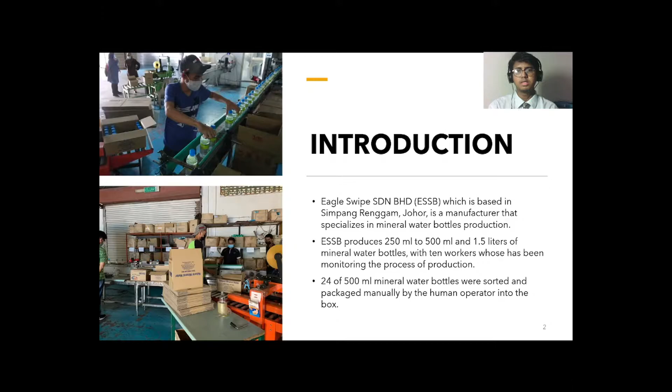In this project, I will focus more on the packaging section, where 24 mineral water bottles are manually packaged by the worker. From this project, there are 3 problem statements that can be determined: the failure of determining the working principle of the automatic bottling packaging machine, which can transfer the bottle into the box without human interference; second, the improper and failure of designing an automatic bottling packaging machine which can replace the manual process with an automation process; and third, the failure to conduct the simulation process on the automatic bottling packaging machine.

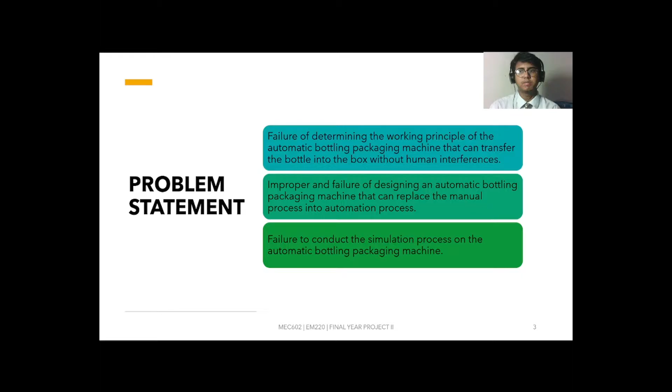Therefore, from the previous problem statements, we can outline the objectives for this project, which are: to identify the process of transferring the mineral water bottle into the box by the automatic bottling packaging machine, which can replace the manual work; and second, to design and simulate the automatic bottling packaging machine.

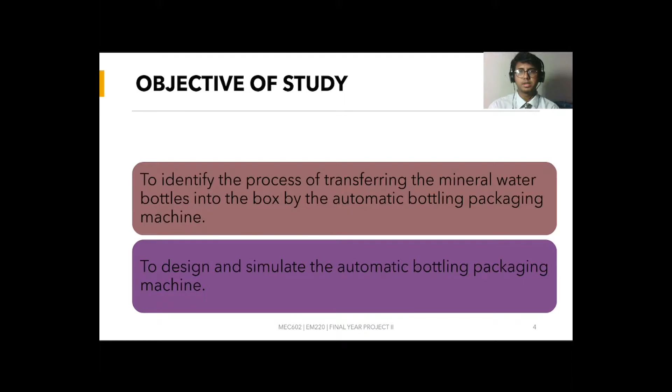The scope of work which has been conducted throughout the whole project are: first, the industrial visit at the production plant; second, conduct research on the automatic bottling packaging machine; third, selection of the correct devices and design to be used in the machine; next, determination of the working principle of the machine; and lastly, design and simulate the machine using computer-aided design, CAD software.

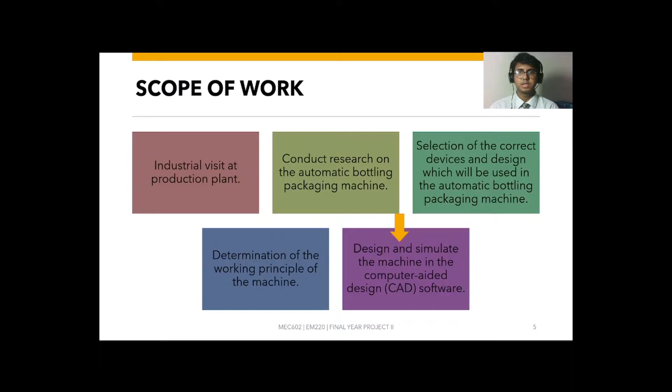As you can see here, this is the flow of research which has been conducted throughout the whole project. First, industrial visit at ESSB, and after that, determine the problem statement and identify the working principle and devices which will be used for the machine.

After that, the design must be drafted. Once drafted, it must be revised with the supervisor. If the supervisor agrees with the design, the next process is to make a CAD design using SolidWorks software. But if the design is disagreed with by the supervisor, we must do a correction by identifying any potential problem which can affect expenses, safety, reliability and quality of the product, and then fix the design to overcome the problem.

After making the CAD design using SolidWorks software, the last process is to conduct a simulation on the prototype of the machine via the motion study feature in SolidWorks. In this flow of research, you can see the first objective shown, and the second objective is also shown.

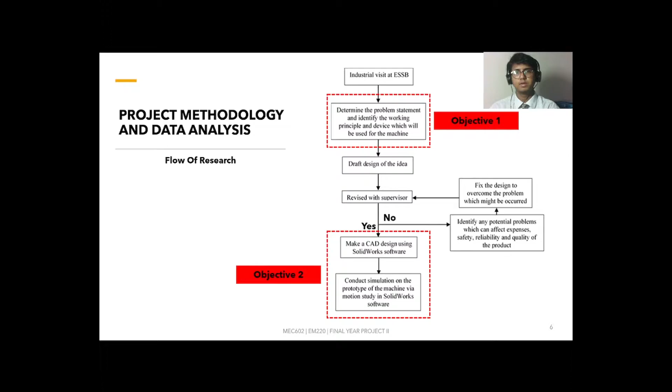As you can see here, this is the industrial visit at ESSB. The purposes of the industrial visit are to determine the existing dimension of the floor plan for the packaging section, second to determine the dimension of the bottle and box conveyor, and lastly to measure the production time in the packaging section.

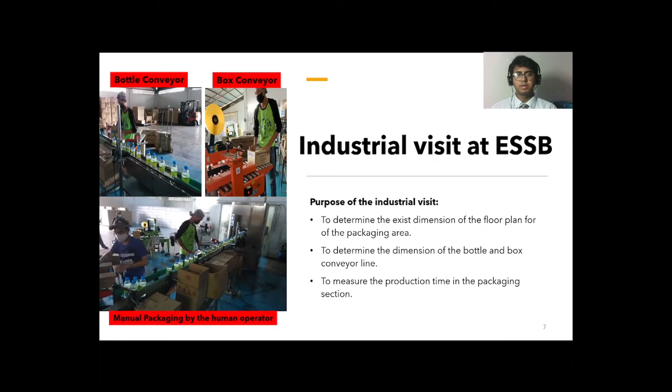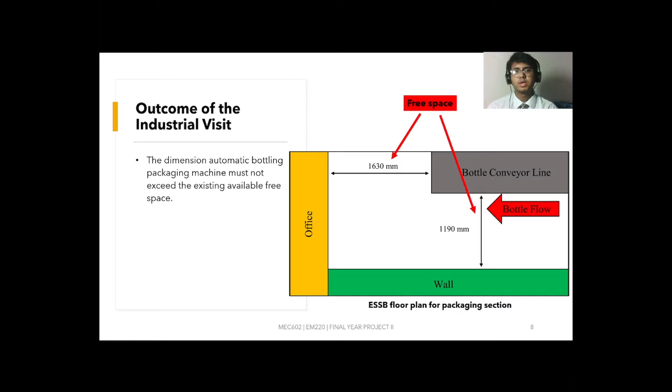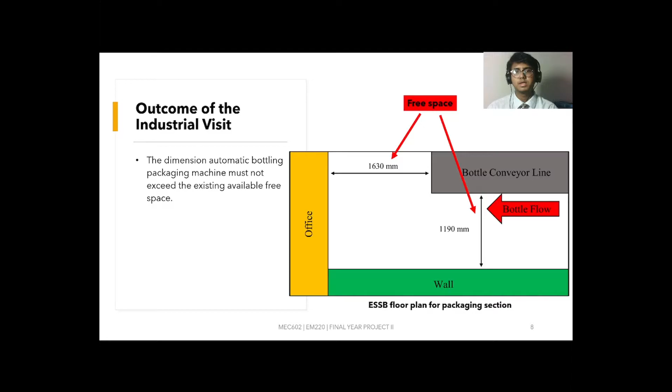From the site visit conducted at ESSB, the dimension of the floor plan for the packaging section was measured. Therefore, the dimension of the automatic bottling packaging machine must not exceed the existing available free space. As you can see here, from the existing bottle conveyor line to the office is about 1630 mm, while from the bottle conveyor line to the wall, the existing dimension at ESSB is 1190 mm.

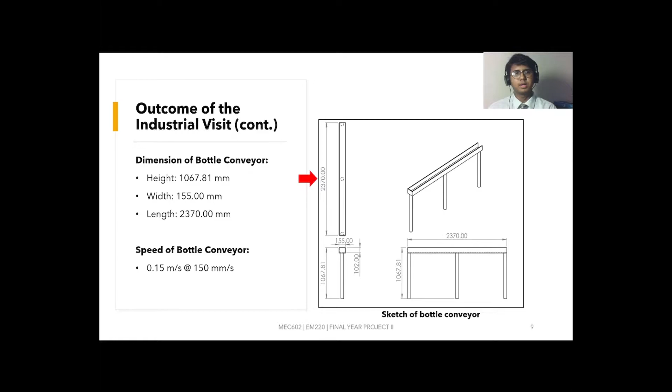From the site visit at ESSB, the dimension of the existing bottle conveyor was measured. The height for the bottle conveyor is 1067.81 mm, while the width for the bottle conveyor is 155 mm. The length for the bottle conveyor is 2370 mm, and the speed of the bottle conveyor was calculated to be 0.15 meter per second, or 150 millimeter per second.

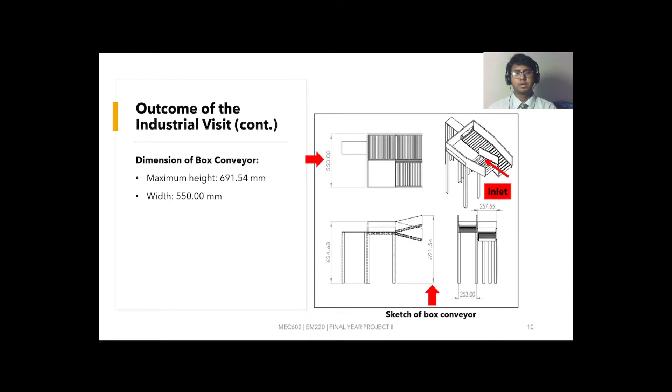From the site visit, the box conveyor was also measured. The dimension for the box conveyor's maximum height is 691.54 mm, where the box will travel along the inlet of the box conveyor, and the width which was measured is 550 mm. From the site visit at ESSB, the duration for 24 bottles manually transferred by the human operator into the box takes about 16 seconds.

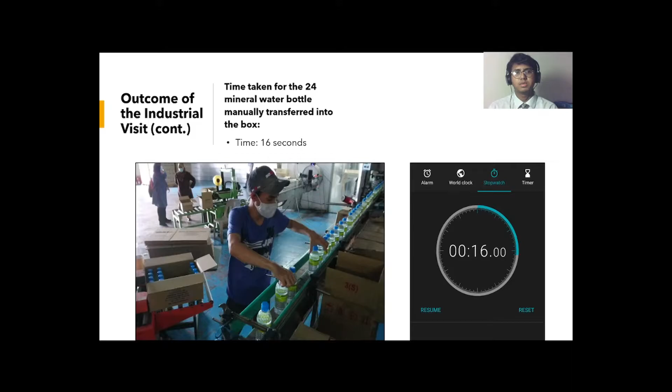In this slide, I will show you the existing automatic bottling packaging machine in the industry.

The model of the automatic bottling packaging machine is 939 APT Versatron Active Product Transfer Case Packer, which was manufactured by Standard Knapp Inc. The mechanism on how the product is transferred into the box is by utilizing the force of gravity. This is the video on how the product is transferred into the box by utilizing the gravitational force.

The product transfers along the bottle conveyor, and as you can see at the bottom of this machine, in this next preview, it will show you the product falling down into the box by the gravitational force.

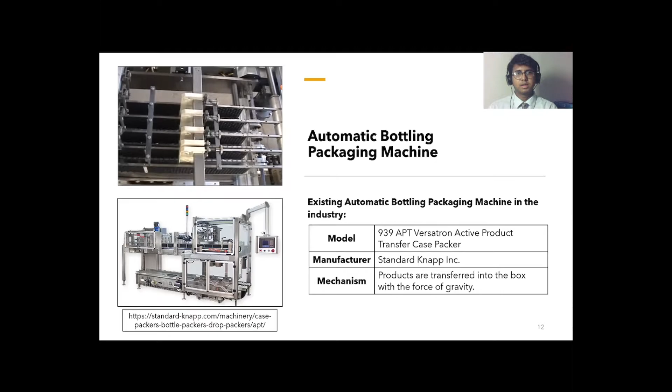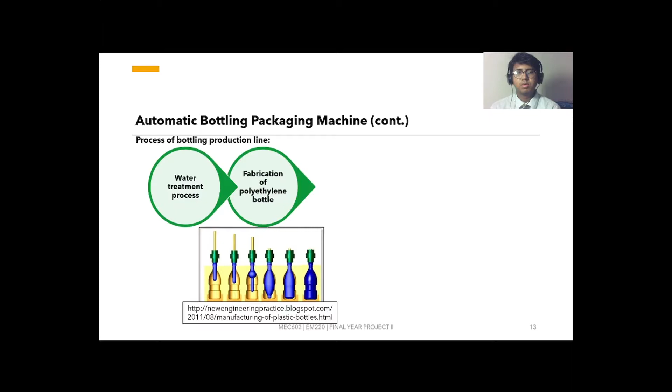In this slide, I will show you the process of the bottling production line. First, the water treatment process. Next, the fabrication of the polyethylene bottle through the blow molding process, and then the water filling process, and after that the labeling process, and lastly the packaging process.

The literature review which is related to this project. First, according to Abueejela et al. 2015 in the automated packaging machine using PLC, packaging process is known as the mechanism that is intended for distribution in form of merchandise, packaging, and bundle into the container, package or protect the material, food, and wood with the utilization of a conveyor belt system.

Besides that, packaging process is also known as the system for preparing products for shipping, storage, logistics, and eventually for the customer. Next, according to Satyanarayana Murthy 2019 in Design of Controller for Inspection, Packaging and Storage, the benefits of utilizing the automatic packaging machine in the production line are: it will meet the industry and consumer demands. Next, it will maintain the package safety, and lastly, it will reduce the environmental effects.

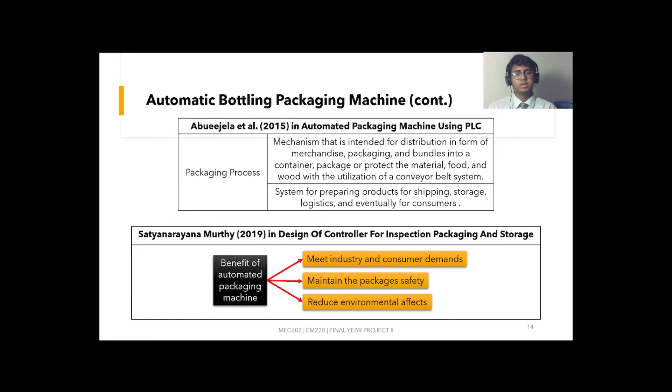There are three main parts in the automatic bottling packaging machine: the input device, controller, and output device. The literature review related to the input device: according to Oladapo et al. in Model, Design and Simulation of Automatic Sorting Machine using Proximity Sensor, a sensor that detects the presence of an actuator or product is referred to as input device.

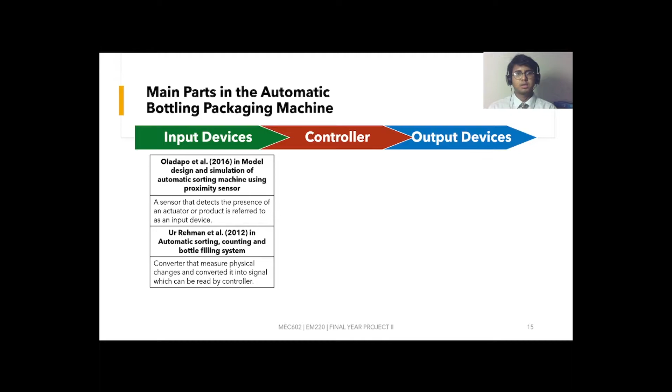Next, according to Ur Rehman et al. in automatic sorting, counting and bottle filling system, input device can be known as the converter that measures physical change and converts it into a signal which can be read by the controller. The controller can be known as the component that interprets sensor data and sends signals to the output device.

According to Saraf et al. in design and development of cost-effective automatic machine for powder packaging, controllers can be classified into three types, which are relay controllers, programmable logic controllers or PLC, and lastly microcontrollers.

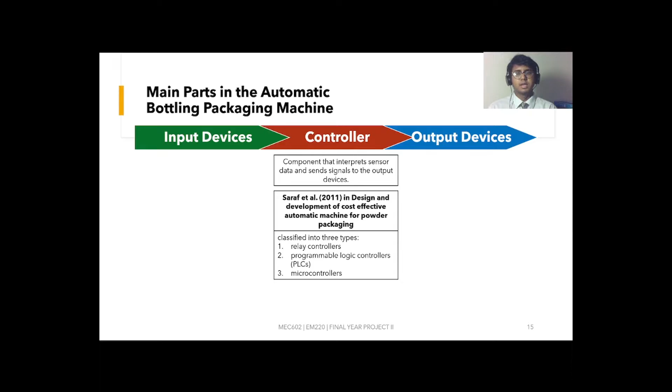The output device can be known as the component that receives the controller electrical signal and converts it to mechanical energy. According to Figliolini and Rea in design and test of pneumatic system for production automation, in the manufacturing industry, pneumatic and electro-pneumatic components are used to solve problems in product and automated process.

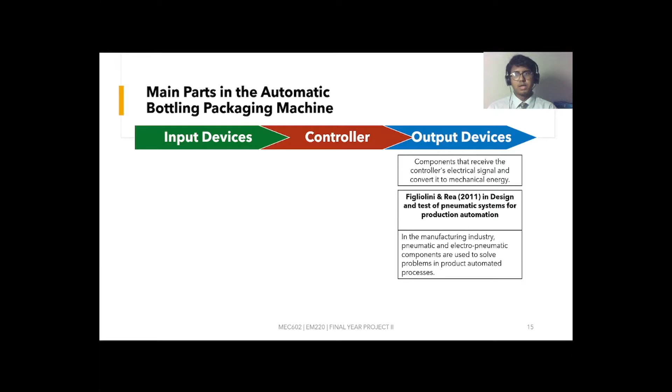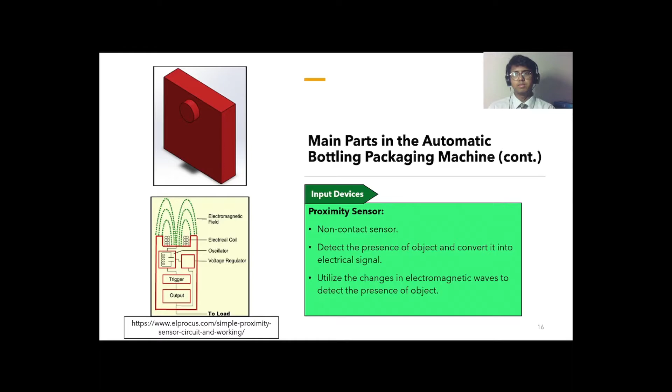For the controller part, the automatic bottling packaging machine utilizes the PLC. According to Mozhi et al. in PLC controlled automatic food packaging machine, PLC can be known as an electronic device with programmable memory that stores instructions and scans the input memory and outputs predictably.

And according to Saraf et al. in design and development of cost-effective automatic machine for powder packaging, the benefits of utilizing the PLC in the industry: it has various input and output arrangements. Next, it is resilient to vibration impact, and lastly, it has a wide temperature range.

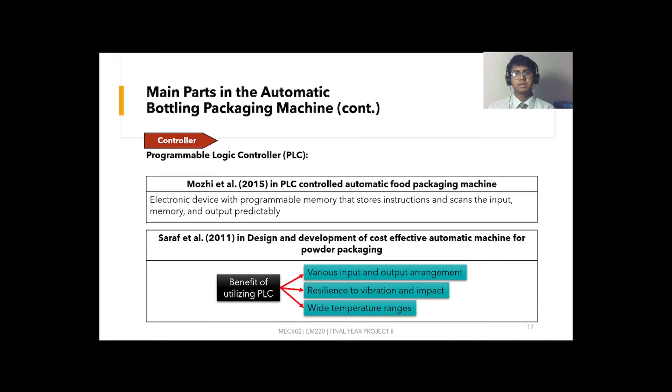There are three types of actuator which exist in the industrial sector. First, the pneumatic actuator. Second, the electric actuator, and lastly, the hydraulic actuator. The advantage of utilizing the pneumatic actuator is it has high safety, cheap price and fast response, while the drawback of utilizing the pneumatic actuator is it has poor stability.

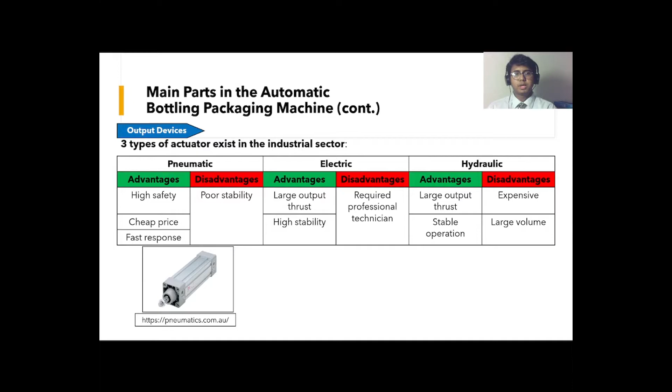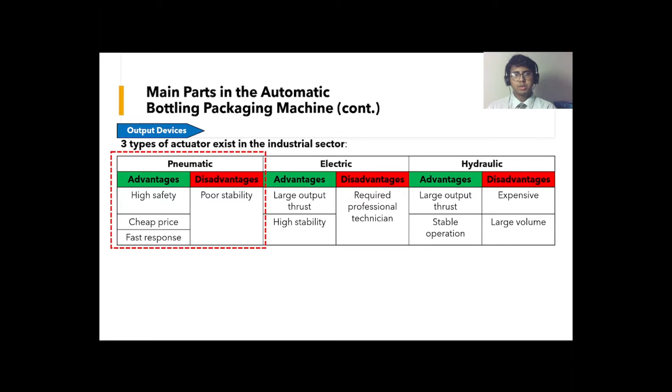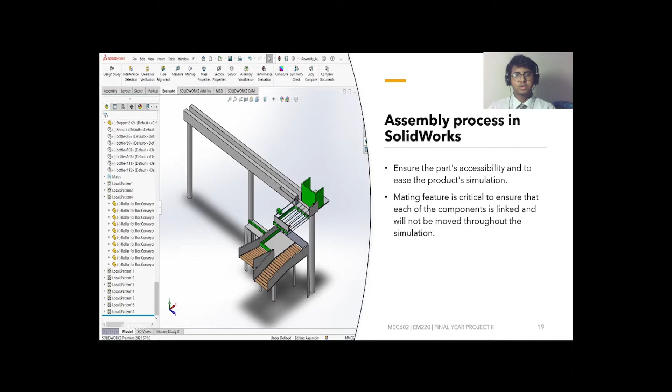For this project, the automatic bottling packaging machine will use the pneumatic actuator. This is the assembly process in the SolidWorks software. The reason why the assembly process must be conducted in SolidWorks is to ensure part accessibility and to ease the product simulation. In the assembly process, there is a mate feature. The mating feature is critical to ensure that each component is linked and will not be moved throughout the whole simulation process.

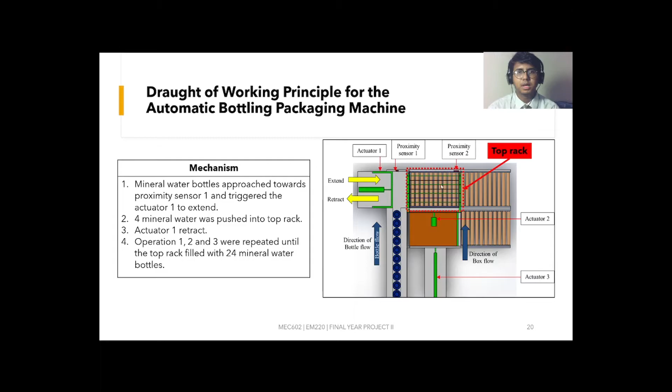In this slide, I will explain to you the working principle for the automatic bottling packaging machine. First, the mineral water bottle will approach toward proximity sensor 1, and it will trigger actuator 1 to extend, and then 4 mineral water bottles will be pushed inside the top rack, and after that actuator 1 will retract. Operations 1, 2 and 3 will be repeated until the top rack is filled with 24 mineral water bottles.

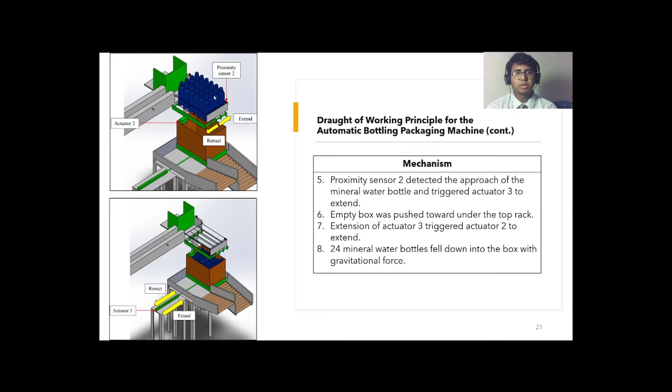Next, after the 24 mineral water bottles fill the top rack, the proximity sensor detects the approach of the mineral water bottle. Here it will detect the mineral water bottle and trigger actuator 3 to extend. Therefore, the extension of actuator 3 will cause the box to be pushed under the top rack. After that, the extension of actuator 3 will trigger actuator 2 to extend. The extension of actuator 2 will cause the 24 mineral water bottles to fall down into the box with the gravitational force.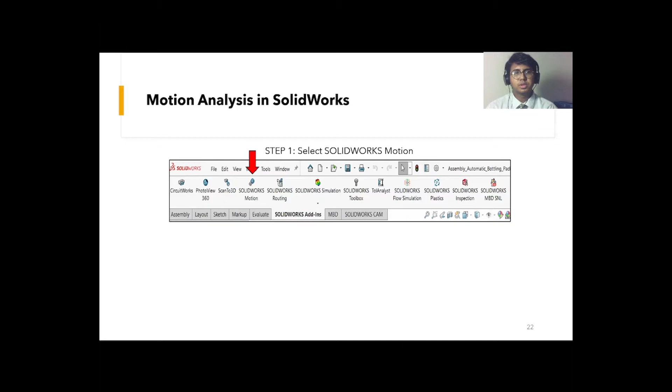In this slide, I will show you the steps on how to conduct the motion analysis in SolidWorks. First, select SolidWorks Motion at the top of the SolidWorks taskbar, and then select motion analysis. Next, I will show you the next step of the motion analysis, which is adding motion analysis features such as the motor feature, contact feature, and lastly the gravity feature. After we have selected the desired motion analysis features, it will turn out like this. It will show in the tree at the left side of the SolidWorks interface.

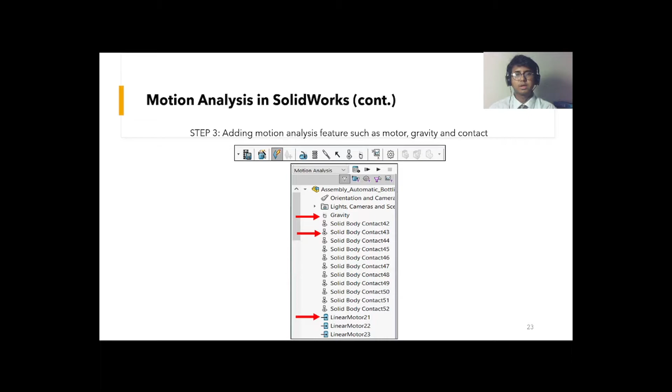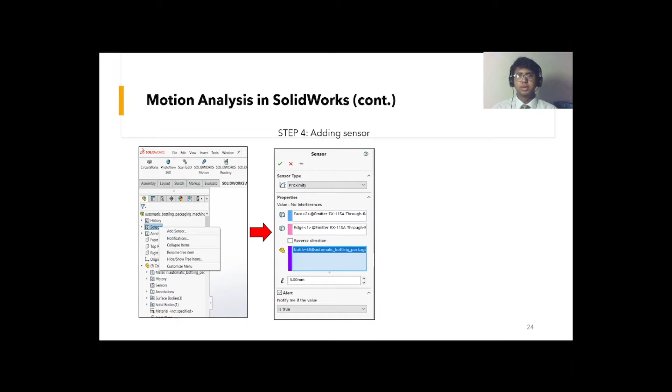Next step is the adding sensor process in the motion analysis. First, select sensor and click add sensor from the pop-up menu, and then it will turn out like this. You must select the place where the sensor is placed in the design, and after that the sensor will look like this in this figure here.

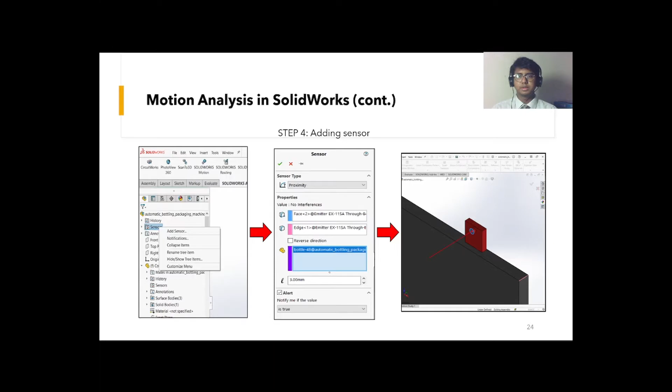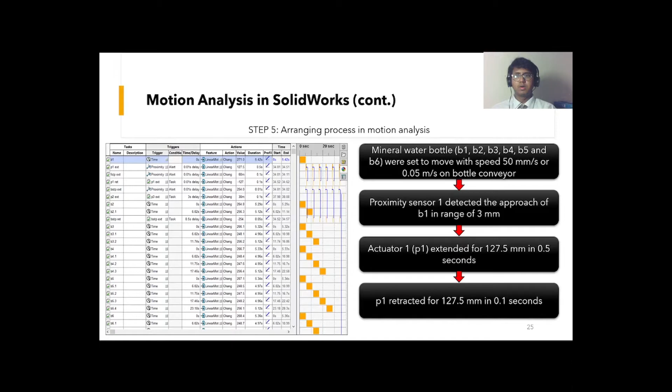In this slide, I will explain to you the arranging process in the motion analysis. First, the mineral water bottles, labeled as B1, B2, B3, B4, B5 and B6, were set to move with a speed of 50 mm per second or 0.05 meter per second on the bottle conveyor. Next, proximity sensor 1, as you can see in the figure at the arrow, will detect the approach of B1 in a range of 3 mm, and after that actuator 1, which is labeled as P1, extends 127.5 mm in 0.5 second. After that, P1 will retract 127.5 mm in 0.1 second.

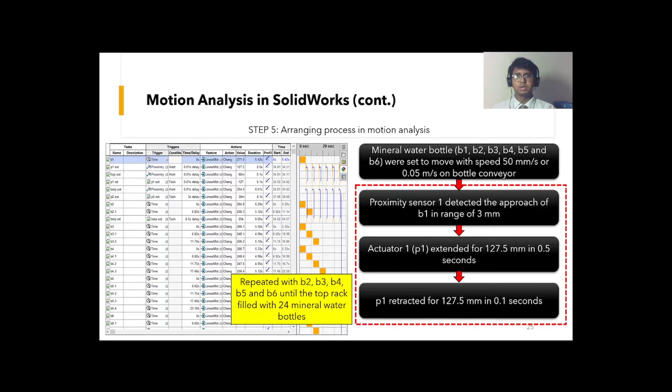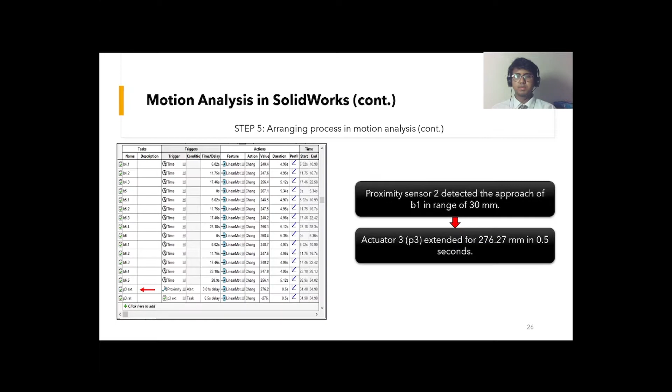The processes 2, 3 and 4 as shown in the text box will be repeated with B2, B3, B4, B5 and B6 until the top rack is filled with 24 mineral water bottles. Next, proximity sensor 2 will detect the approach of B1 in a range of 30 mm. This will cause actuator 3, which is labeled as P3, to be extended 276.27 mm in 0.5 second. After that, the simulation continues with a 3 second delay, and then actuator 2, which is labeled as P2, will be extended 30 mm in 0.1 second.

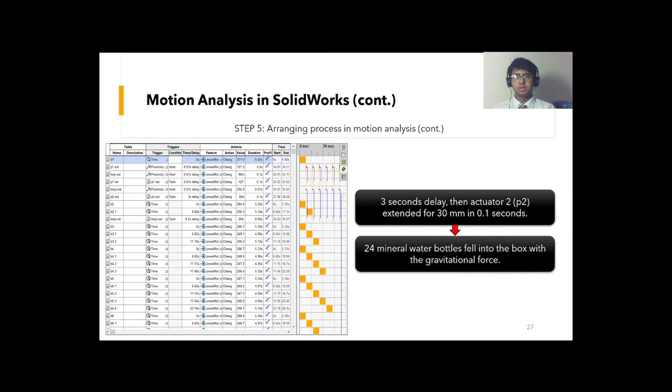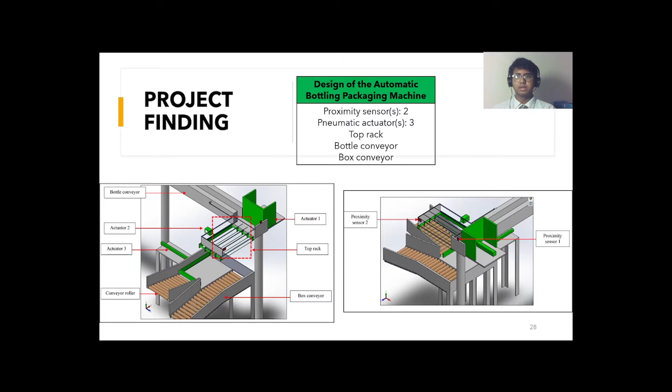As you can see at the arrow shown in the figure, P2 EXT is the actuator 2 extend, and after that 24 mineral water bottles will fall into the box with the gravitational force. From this project, we can find that the automatic bottling packaging machine is designed. Here are two points of view of the automatic bottling packaging machine from the front side and the back side. In the design, there are 2 proximity sensors and 3 pneumatic actuators. There is also the top rack as shown here, the bottle conveyor here, and lastly the box conveyor.

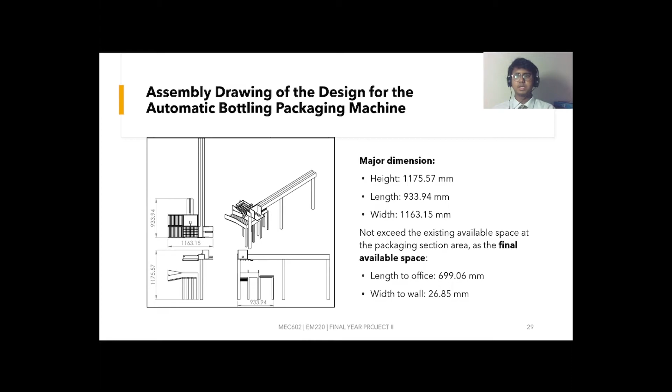Here is the assembly drawing of the design for the automatic bottling packaging machine, which is generated from the SolidWorks software. The major dimension is 1175.57 mm. The length of the packaging machine is 933.94 mm, and the width of the automatic bottling packaging machine is 1163.15 mm. Thus, the dimension of the automatic bottling packaging machine does not exceed the existing available space at the packaging section, as the new length to the office will be 699.06 mm, and the new width to the wall from the packaging machine is 26.85 mm.

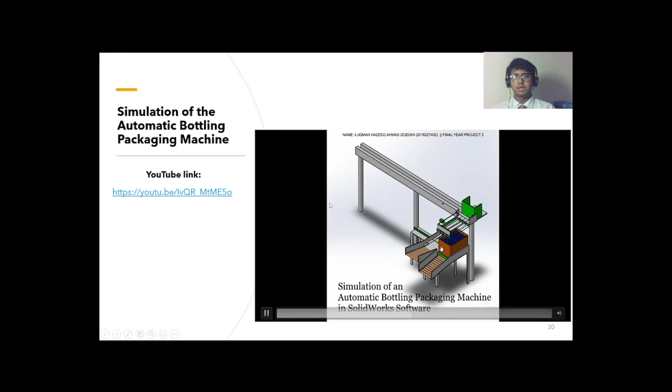Firstly, the bottle will approach the proximity sensor 1 and it will trigger the actuator 1 here to extend and retract back, and the process continues with the bottle behind the bottle that has been pushed by the actuator. The process continues and repeats until the 24 mineral water bottles fill the top rack, and after that the bottles will fall down into the box by gravitational force.

This is the close-up version of the simulation. As you can see here, the actuator pushes and retracts as it is triggered by the proximity sensor 1 here. And after the process of filling the 24 mineral water bottles in the top rack, it will push first the actuator 3, where the box will be pushed here, and then after that, as you can see before, after the extension of the actuator 3, it will trigger the extension of the actuator 2.

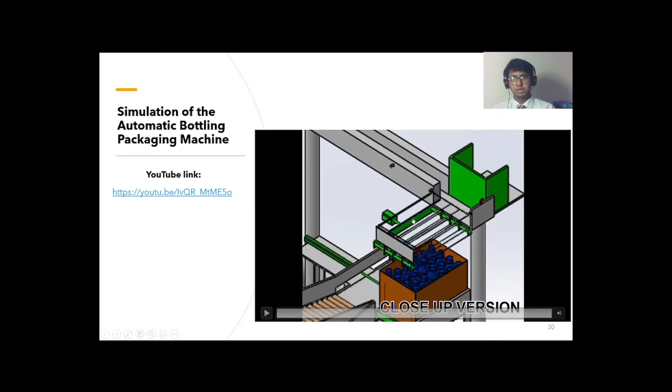We will be moving on to the analysis of the simulation. According to the simulation, the total process of the simulation conducted by the automatic bottling packaging machine is 38.5 seconds. The duration was taken by using the speed of the bottle conveyor, which has been set to 0.05 meter per second or 50 millimeter per second.

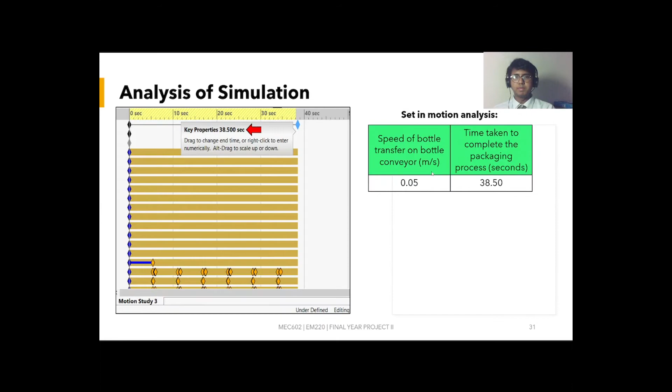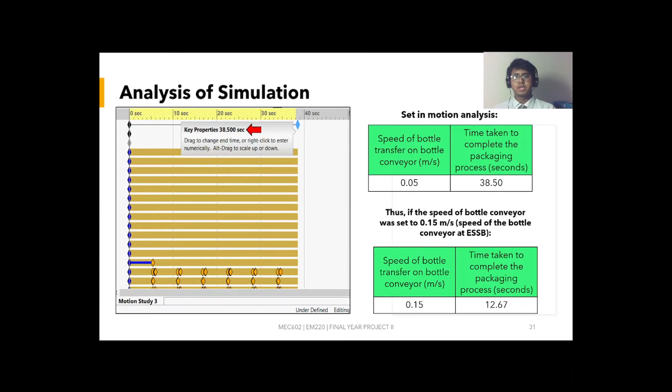Thus, if the speed of the bottle conveyor was set to 0.15 meter per second, which is the same as the existing speed of the bottle conveyor at ESSB, the total time taken to complete the packaging process will be 12.67 seconds.

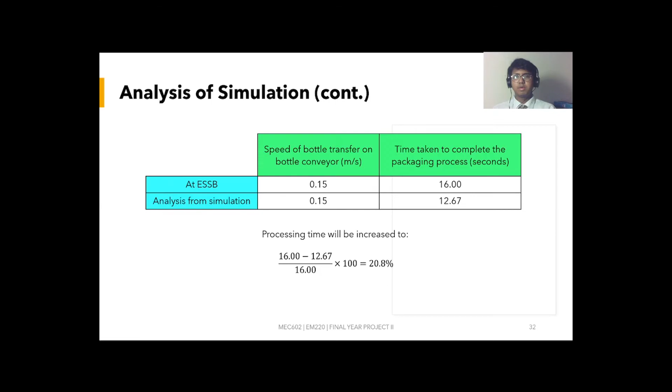As you can see here, this is the comparison of the time taken during the site visit at ESSB, which takes about 16 seconds, and the analysis from the simulation of the automatic bottling packaging machine. This shows the simulation is much faster than the manual packaging by the human operator at the plant. Then the processing time will be increased by 20.8%.

In this slide, I will present to you the comparison between the production produced by the ESSB and the new production simulated via the motion study in SolidWorks. For 1 minute, 3 boxes will be produced by ESSB, while in 1 minute, 4 boxes will be produced by the automatic bottling packaging machine via the motion study simulation. And for 1 hour, 225 boxes will be produced by ESSB, and for 1 hour, 284 boxes will be produced by the simulation in the motion study.

For 1 day, in 8 working hours, 1,800 boxes will be produced by ESSB, and 2,273 boxes will be produced by the simulation of the motion study of the automatic bottling packaging machine. For 1 month, in 26 working days, 46,800 boxes will be produced by ESSB, and 59,100 boxes will be produced by the new production via the motion study in SolidWorks. The difference between the new production and the existing production at the ESSB is shown in the table here.

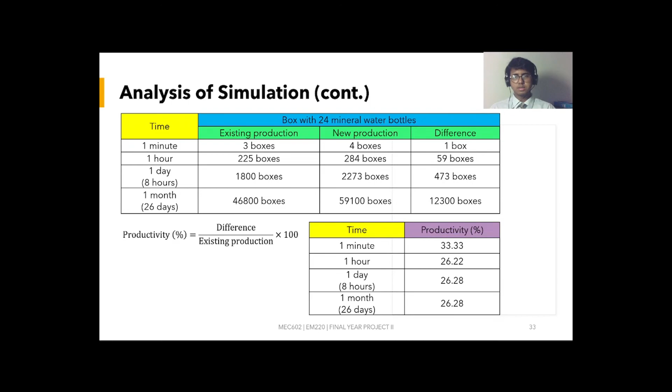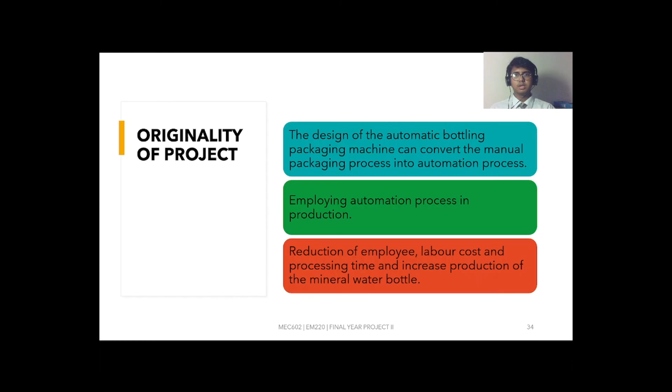The originality of this project is that the design of the automatic bottling packaging machine can convert the manual packaging process into an automated process. Second, employing the automation process in production can enhance automation, where it will reduce human interference. And lastly, the reduction of employees, labor cost and processing time, and the increase of the production of mineral water bottles for an SME company such as ESSB.

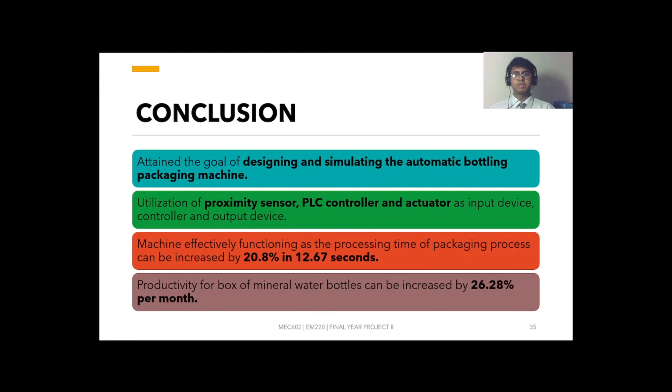Lastly, for conclusion, the project has attained the goal of designing and simulating the automatic bottling packaging machine. Next, the utilization of the proximity sensor, PLC controller and actuator as the input device, controller and output device in the design of the automatic bottling packaging machine. Next, the machine can function effectively, as the processing time of the packaging process can be increased by 20.8% in 12.67 seconds. And lastly, the productivity for boxes of mineral water bottles can be increased by 26.28% per month.